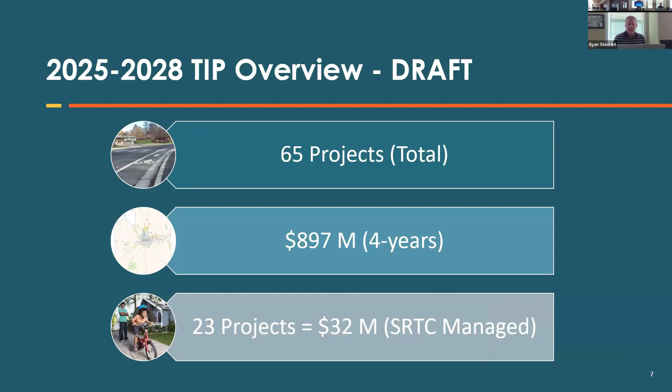We have bridge projects. There are several bridge rehabilitation, repair, and even replacement projects in the 25 through 28 TIP. STA has been very busy developing their high performance transit network, and projects related to the Division BRT, which you'll hear about in just a little bit, are included in this draft TIP.

There are a couple of planning projects underway. Preservation projects are projects meant to treat roadway surfaces to extend their lifespan, as opposed to reconstruction projects, which actually reconstruct the roadway.

We have one rail highway crossing project included, a very important project in the City of Spokane Valley. There are other roadway capital projects, the biggest of which include the final sections of the North Spokane Corridor and its connection to Interstate 90.

We have some safety and security projects included, mostly related to safety improvements such as signing, roundabouts, or other intersection or roadway treatments. I mentioned Spokane Transit; they also have some bus replacement and other FTA funded projects included.

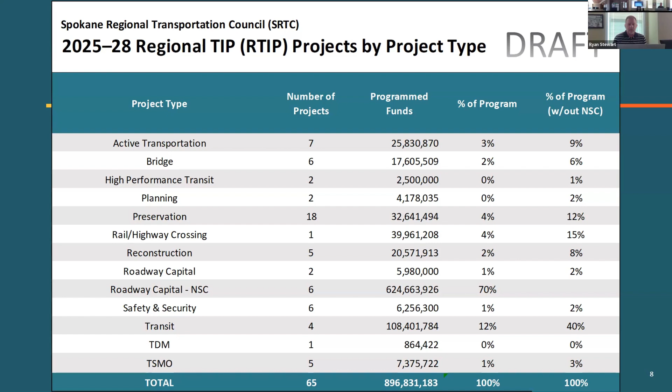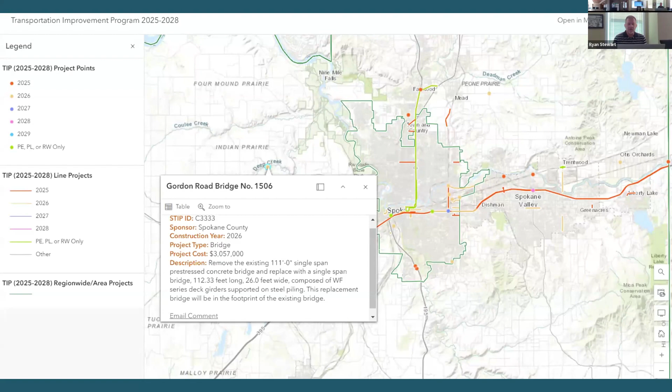Our public engagement process has been underway since the beginning of September. The public comment period lasts until Monday, September 30th. The TIP public meeting is ongoing today, and this is being recorded, so the recording will be available on our website as well.

The remaining timeline for the development of the TIP includes today's public meeting. We'll be in front of the SRTC board on October 10th, where they'll consider a recommendation from our committees and staff to approve this new 25 through 28 TIP. Projects included are submitted to Washington State Department of Transportation's Secure Access Washington portal, due by October 18th. Once submitted, they're included in the statewide transportation improvement program, which we anticipate will be approved by Federal Highways and Federal Transit in early January.

Today's meeting will have some featured projects from some of our member agencies. At this time, I'll turn it over to Bob Turner with the City of Spokane Valley to discuss their projects.

Thank you, Ryan. Would you allow me to share my screen, or do you already have that loaded in your system? You should be able to share now. Okay, there we go, I think that's it. All right, can everyone see that? It's starting to come up here. Okay, there we go, okay, thank you again.

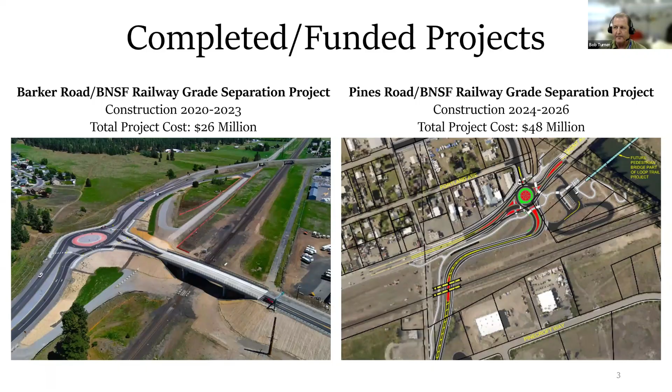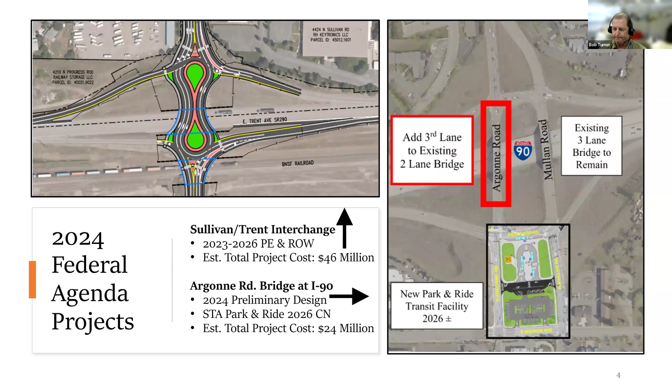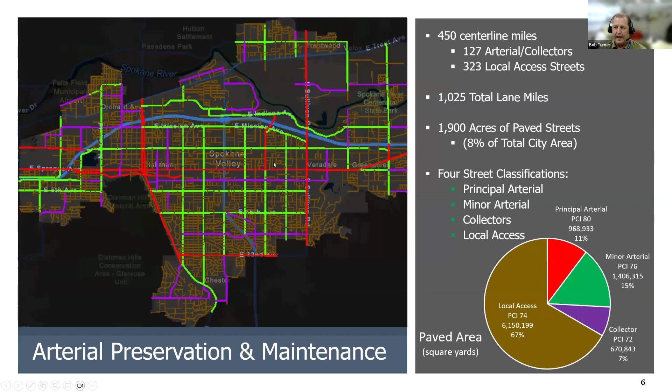We did want to highlight our arterial preservation and maintenance. That's something very key to us. All the money we have now going into preservation is in our arterial system, which we will continue to focus on to maintain those assets which we're fortunate enough to get grants for and build.

Does anyone have any comments or questions for me? If not, Ryan, I have a meeting with the DOT to go over some of our safe route to school projects in the field, so I'm going to have to leave now. So speak now or forever hold your peace. Well, if anyone has comments that come to mind after Bob leaves, please feel free to use the raise hand or chat function. I'll follow up with you later, Bob. Thank you very much. Great, thank you. I really appreciate it. Bye.

Next, we'll have Inga Note from the City of Spokane to talk about their projects.

All right, thank you, Ryan. I'm just going to go through a few of the projects on our list. We have a lot of them in there, so I'm just going to highlight some of the different ones.

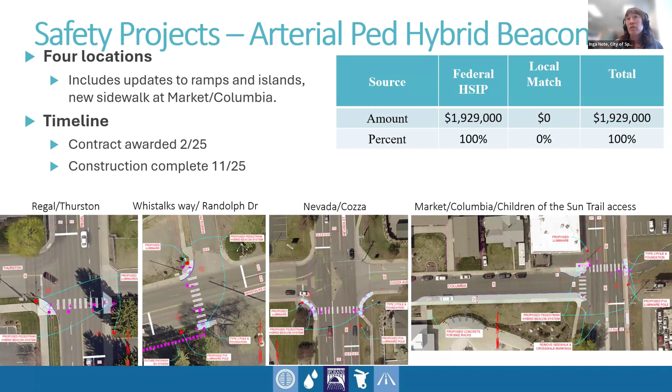The Millwood Trail is a project that's been in the works for a long time between various different agencies. For this one, we received some Move Ahead Washington funding and carbon reduction program funding for a total of $6.4 million. This will run along the south side of the Spokane River, tying into the Children of the Sun and the new non-motorized bridge over the river there, next to where you can see Green Street right now.

And we'll continue east over towards the airport, Felts Field Airport. From there, there's an on-street connection where you can get to the segment that's already been built within the city of Millwood. So this one, we're looking at 2026 construction.

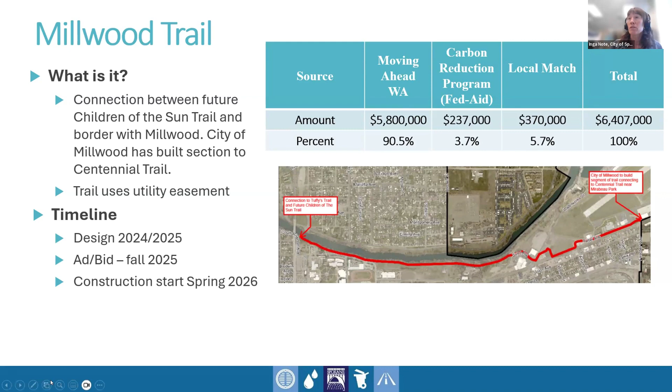Fish Lake Trail to Centennial, another one that's been in the works for a long time. This is a 2-phase project that will make a connection between the Fish Lake Trail and the bridge at People's Park, which already has a trail in place that takes you up a hill to the Centennial Trail, tying into that in the Kendall Yards area.

We are currently doing the final design of phase 1, which is the part closest to the Fish Lake Trailhead, and that'll take it to the top of the dog park, where there's an entrance at 5th and Government Way. The second phase will continue down the hill through the park, cross over Riverside Avenue, and tie into the bridge there. We're looking for construction of phase 1 in 2025.

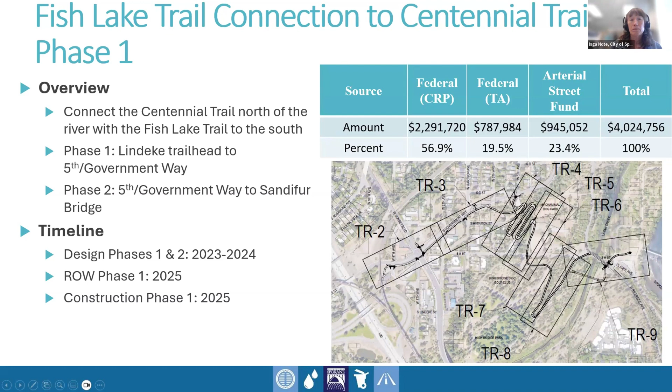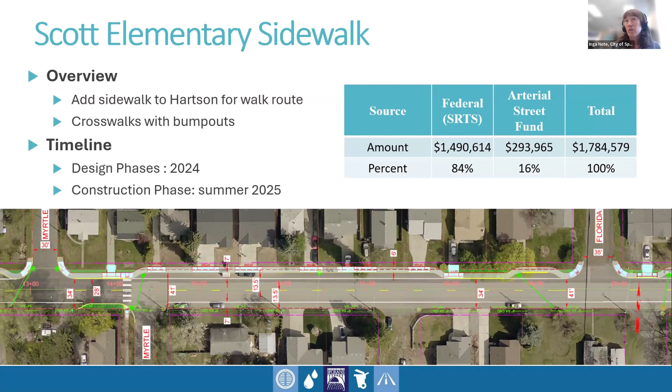We have a couple of safe routes to school projects. This one I'm highlighting is Francis Scott Elementary, just to the east of Freya and south of the freeway. We are adding some sidewalk along Hartson, an arterial that doesn't have sidewalk on either side, and also a major connection between Freya and 8th Avenue and Spokane Valley. So we're putting in sidewalk with some bump outs and crossing improvements, maintaining the parking lanes, which should make it a lot easier for kids to get through there.

US 195 Meadow Lane. This project will improve the intersection on US 195 where Meadow Lane currently comes in. We're essentially going to close the current Meadow Lane connection and move it to the south by extending Eagle Ridge Boulevard into US 195, then separate out the movements by building a J-turn at the north end. So instead of all the movements coming through the same intersection, we're going to split them between 3 different locations, which should make it quite a bit safer and add capacity.

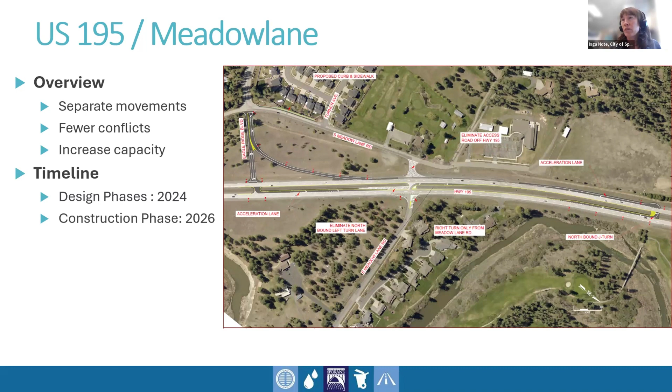And this one, I don't have the exact numbers on there, but it's about a $2.4 million project.

The last one I have to share is the Freya Palouse Roundabout, which we also call a peanut about because of its shape. It has 5 legs because we need to tie in 51st Avenue, which is actually a county local street, but it's really the only way in and out of the neighborhood at the south end. So we need to make sure we maintain access for all directions of traffic to get in and out of there.

Also, as part of this, we're going to finish off the section of the Palouse Highway pathway that runs to the northwest, which already has a section in place continuing up towards Target and the park up there. We're going to extend that through the roundabout and continue it a short distance down Palouse Highway to the south as well, with the intent that eventually the county will pick it up and carry that forward and tie it into the park and ride. This one is 2026 construction.

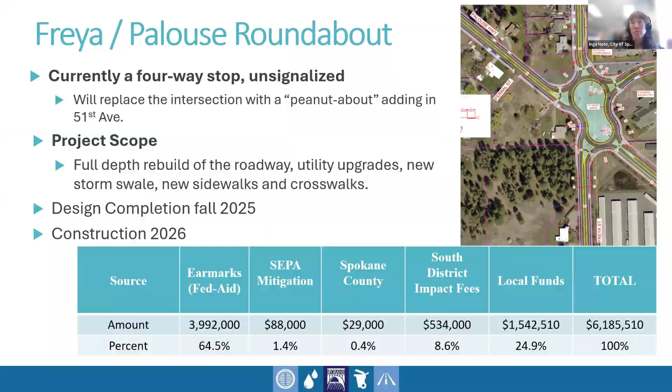Great, any questions? That's all I have.

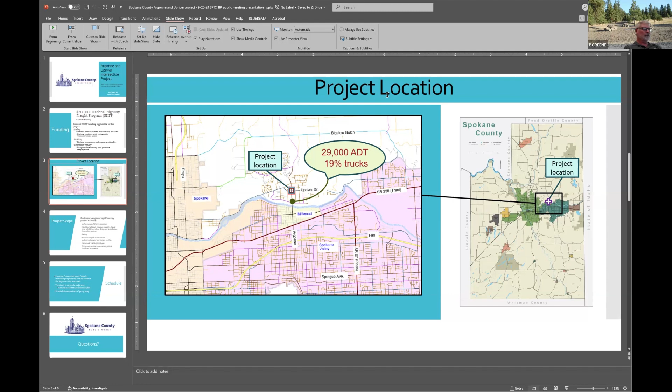And that is the conclusion of my presentation.

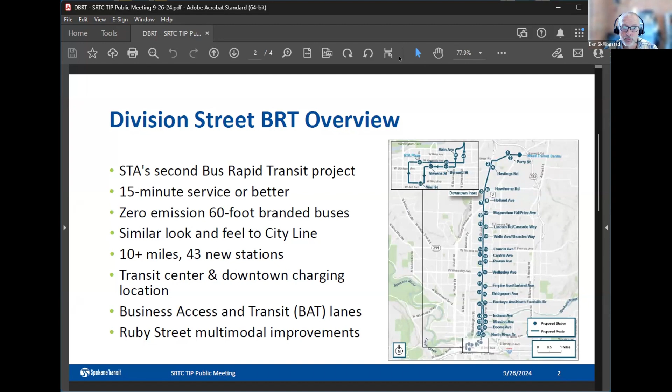Right now we're in our 30% design phase. We are working with the agencies on incremental reviews of our plans because we have about 45 different construction sites for this project. It's a fairly comprehensive and extensive plan set, so we're working with the agencies on incremental reviews of packages of stations as we get them completed.

We're working extensively with utility providers, namely Avista, since our electric vehicles and charging locations require significant power to our charging location as well as our stations throughout the alignment.

We started the environmental process with FTA. We've initiated our historic and cultural resources consultation with state and federal agencies. We've also started our work on our grants application package, which is fairly extensive. And we're working right now on our fall outreach calendar, scheduling events with neighborhood councils, open houses, online events, those sorts of things.

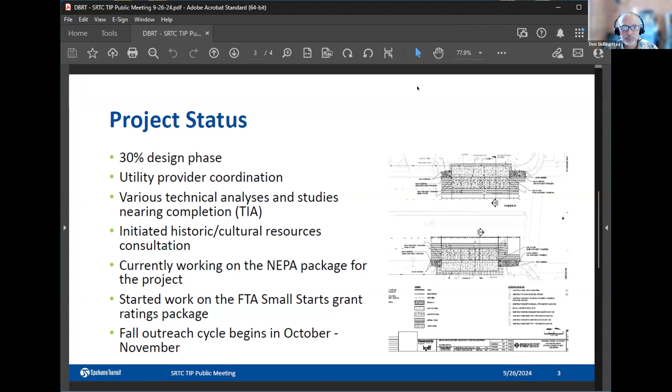For our project schedule, we will continue with 30% design until about March or April of next year. During that time we'll be working on our NEPA package, and we're also starting work on our grant package. So those three major tasks will continue on through spring of next year.

We'll transition into our 60% design phase, completing hopefully NEPA and 60% design at the end of next year. That will roll into our state environmental process and our 90% design phase, which we hope to complete late spring of 2026, and begin our final plan reviews and permit reviews with all the agencies of jurisdiction.